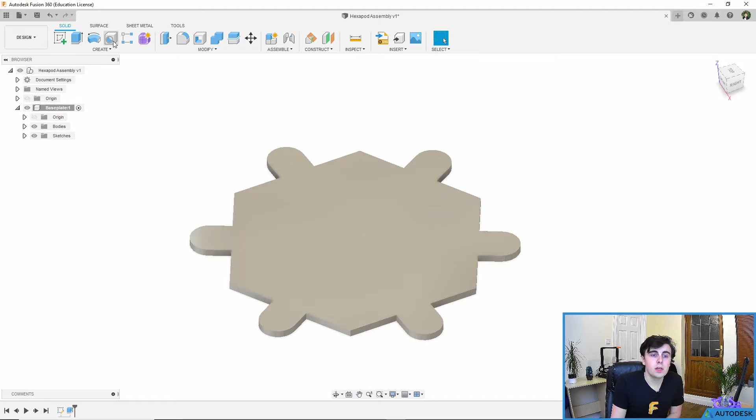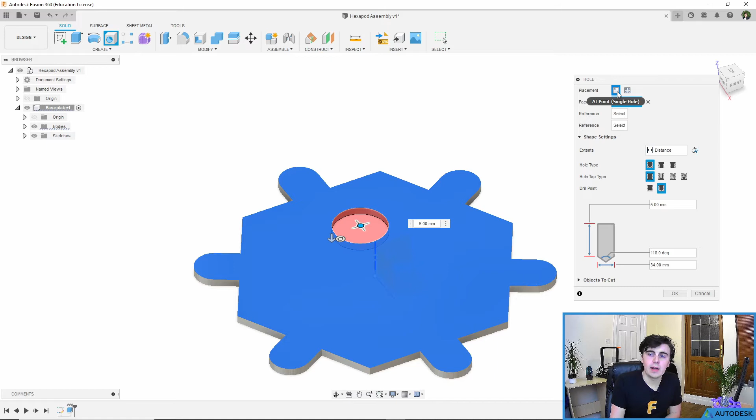What the hole tool does is it allows you to select a face and create a hole in that face of a certain size. There's a lot of different features you can use to create tapped holes, simple holes, or countersunk holes. In this case, we just want a simple one, and that's the default settings. But we want to make multiple, and with the normal at-point single hole placement, we can only create one.

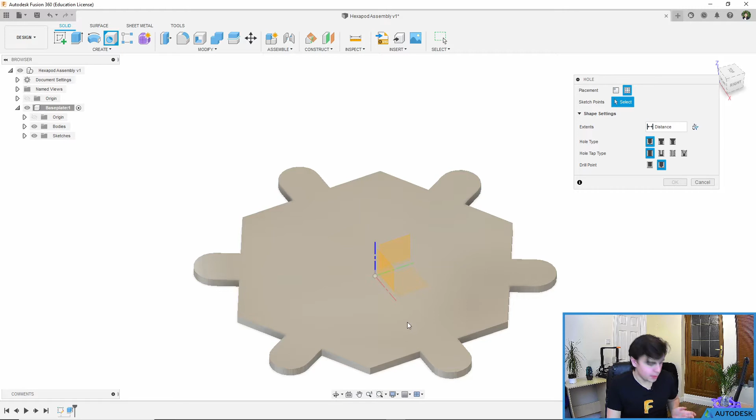So what we want to use is the from sketch multiple holes option. Now this allows you to use sketch points as references to create holes on. And if you remember, the sketch that we had those points referenced already from the semicircle. But you might notice that it's disappeared. Now the reason for that is that when you've extruded your sketch, Fusion automatically presumes that you've used your sketch and you no longer need it, so it's hidden.

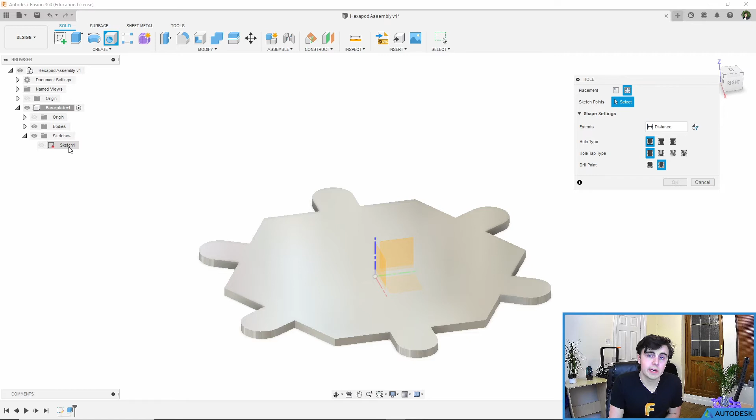If you remember, I talked about the little eye icon in the browser, and we can see within our base plate we have a sketches folder, and within that we have our original sketch that's hidden. If we click on the eye, you'll see it come back. It's just because Fusion thought we were done with it, but actually we want to use it again.

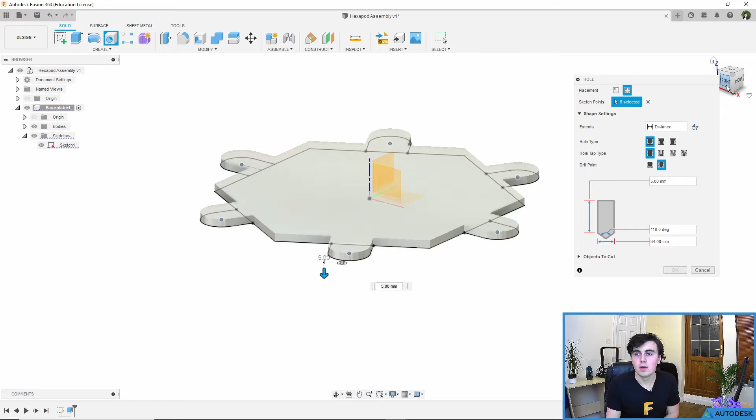And now what I can do is from multiple sketch points, I can select our 6 sketch points to put holes in. But again, you might notice nothing's happened, and the reason for that is that our arrow is facing down. Because we put our sketch on the bottom of our part, we actually want our hole to be upwards.

And so what you can do is, in the extents, after distance there's this little icon called flip direction. If I click that, you'll see that my direction has flipped, and it's started to cut some holes. In Fusion, when something's being cut away, it represents it with a transparent red area. Now currently, my holes are really big.

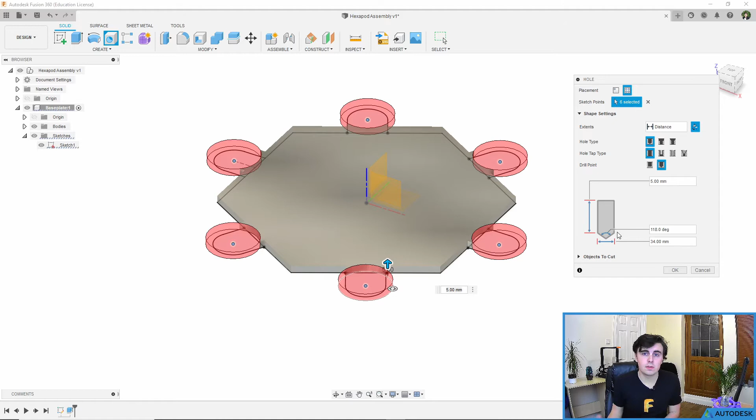If you look at the diagram on the hole tool, there's a little area at the bottom which defines the diameter, and it's currently 34 millimeters. Now this can be based off a preset, or off what you last typed in. Don't know why it's 34 for me, I don't know what it is for you. But you can change this to be 5 millimeters, which is how big we want each of our holes to be.

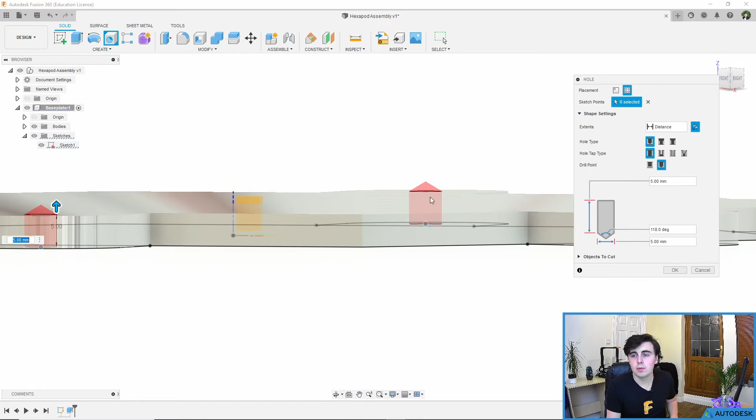You'll see now that these holes are cut out of our body, and they should cut all the way through. You'll also notice a cone on the top. That's a default setting, but you can change it here if you want, which is based on drill bits, so very useful. But it's 5 millimeters all the way through. Now it's automatically defaulted as 5 millimeters thick, but I'm just going to change this to show you another way you could do this.

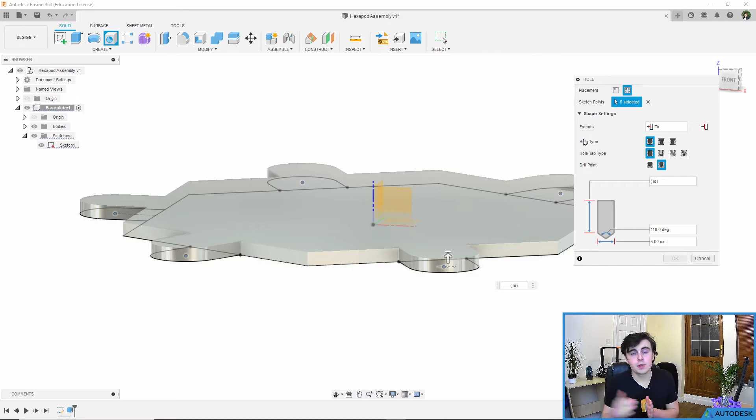In the extents box, you can change this to the To option. What the To option does is it allows you to cut or join or create something up to a surface. In this case, I've selected To, and now I'm selecting this top face, and you'll see that it automatically cuts our hole to that face, to that plane. It's changed it here to To, and it's just a selection. You could do it either way, but it's good to know both ways.

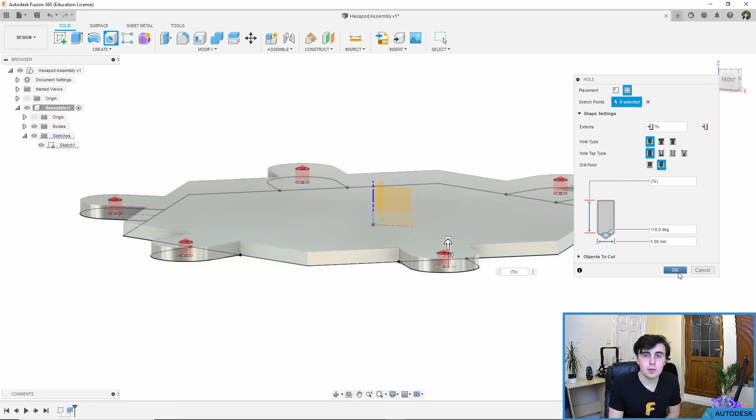Once you're done with your holes, click OK, and you'll see that your holes appear in each of your parts. You'll also notice that in our timeline we have our sketch, we have our extrusion, and we have our holes. And what that means is that by using the hole tool, we can go back and change our holes individually without having to go in and change our sketch, which makes it a really useful tool.

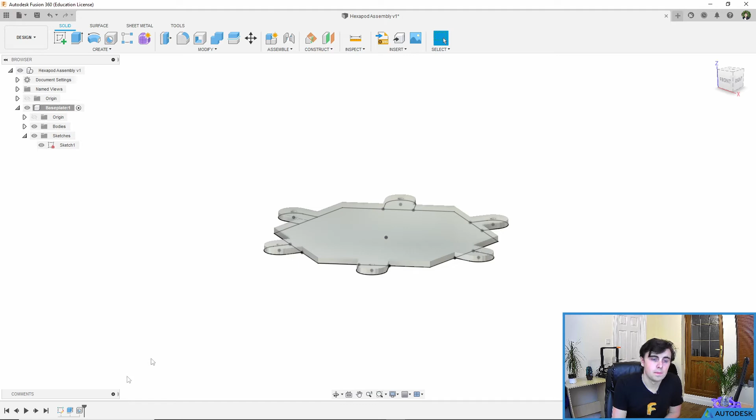I'm just going to hide our sketch again so that it's out of the way. Now that we've done this, we're going to make sure that we save. We're going to click save, and I'm going to say baseplate created. Click OK. You'll see a little tick appear at the top, hopefully.

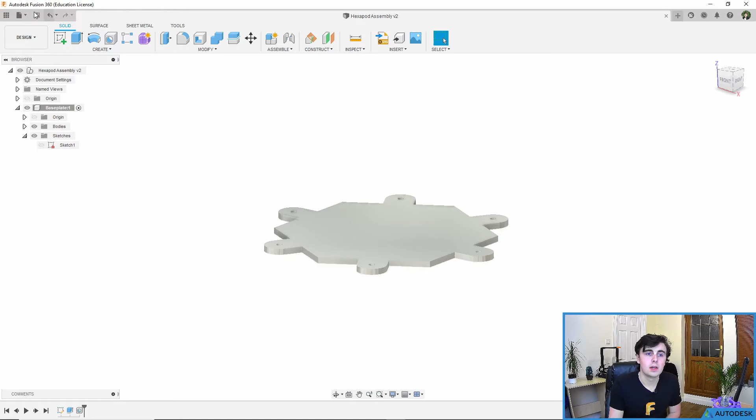It will change to be V2, which means that the Hexapod Assembly is the second version that we've saved. If you look in your data panel, you'll see that we're now on V2, and it shows I updated this 9 seconds ago. As you save, all your versions will continue.

Something you might notice is on the right hand side here, you have the options to open and promote. What these do is allow you to go back into your versions and take a look at what you did. In this case there's not much to see, but if I opened our created item, it would open that version at that time and we could look at it. It would be locked, we wouldn't be able to edit it, but we could look at it.

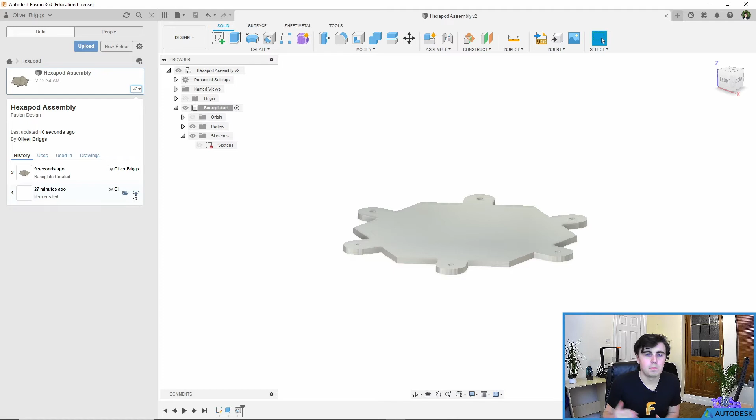Secondly, you can promote, and what this does is take that version and save it as the newest version. It won't delete all the versions you've done since, so if you do some work you don't like and want to revert back to an old version, it won't delete all the work you've done, so you can always revert to the revert, if that makes sense. You can promote any version up to be the new version. It's a really useful tool if you want to go back to a version you previously had. I just thought I'd show you that.

Now the way that we're going to do this is we're going to use the Modify menu, and we're going to add in some fillets, and then we're also going to go in and change the material. So first thing we're going to do is add in some fillets.

If we go into the Modify menu, you'll see second down is fillet. You can also press F on the keyboard, and this opens up this box. This will probably be the one it defaults to, and we want to select the type as a normal fillet to start with.

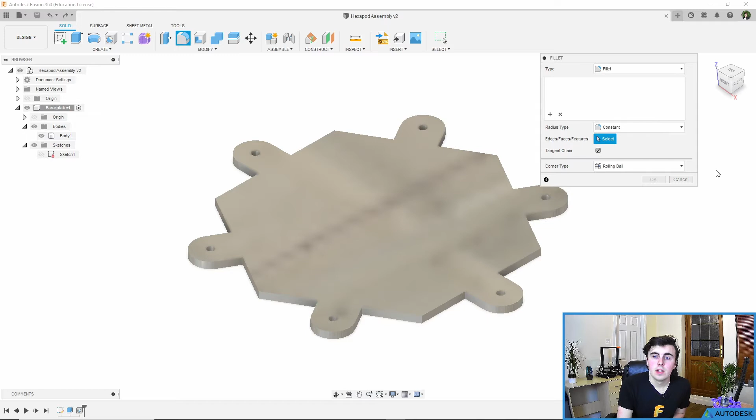You'll see we have this weird clear table box, but what we want to do is take away some of these sharp corners that we have on the outsides here and on the inside edges as well. So I'm going to start with these outside edges. I'm going to click on each one, and you'll notice that because we're using the fillet tool, Fusion recognizes that we're trying to select an edge.

You can still select a face, but we want to select these edges, so you can go through and select them. Normally you can't just hover over something and select an edge unless you change your preferences, but there is a way, and I'll show you that in a little bit.

We have our 6 edges selected for these outside corners. You can see it says 6 edges here, so that's right, and we can apply a fillet of, say, 5mm. I'd say that looks pretty good, but ultimately this is your design, so if you'd like to add a bigger fillet or a smaller fillet or not have a fillet at all, that's absolutely fine as long as you know how to use the tool.

You can also drag the arrow to make the shape whatever you want it to be. I'm going to leave mine at 5mm.

Now I also said we wanted to do these inside edges, and whilst I could continue to select it and add this up to 12, it would mean all our fillets would have to be the same size. Alternatively, I could theoretically add another fillet tool, press OK here and add another fillet tool. The problem is, as soon as you start doing that too much and add fillets with different sizes, you end up with a lot of different fillet tools in your timeline.

So a little tip you can use is this Add Selection Set button. What this does is add a second line in your table when you click on something, and it makes it a separate edge selection, so you can use different settings and different radius sizes for that. So I'm going to go through and select all of these inside edges here.

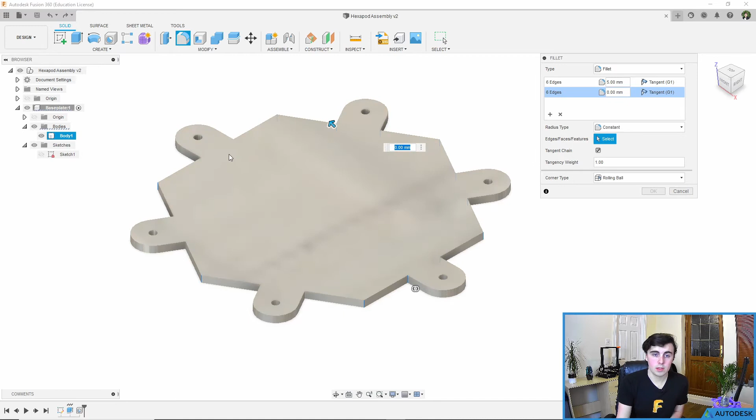I talked just a minute ago about another way you can select an edge. One really useful tool, we don't need it here necessarily, but if you're trying to select a body or something, you can hover over the area that you want to select. If your part is behind this body, hold the left mouse button, let go once this appears, and you'll see this dialog box appears with all the different options of what is there.

So we have 2 faces and an edge. This allows you to select multiple different parts that are hidden behind. It's a really useful tool if you're trying to get to something without having to hide all the bodies and re-bring them back. In this case, we don't really need to, we can just select them because we're in the fillet tool, but it's a useful tip to know about.

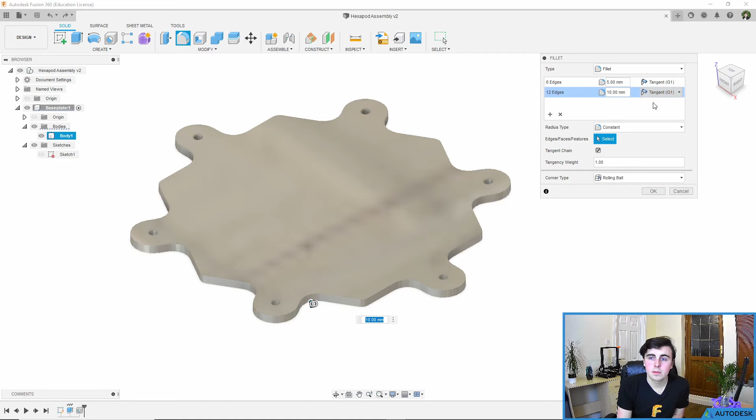We should have 12. Good. And again, we can just drag our arrow. Now I think that 5mm looks a little bit small for these, so I'm going to make mine slightly bigger, but again, you can do whatever you want, it's your design. So I'm going to make mine 10mm, I think it looks quite good. I'm going to leave all of our other settings, but you can change other things if you want to have a play around with them. Once you're done, you can press OK.

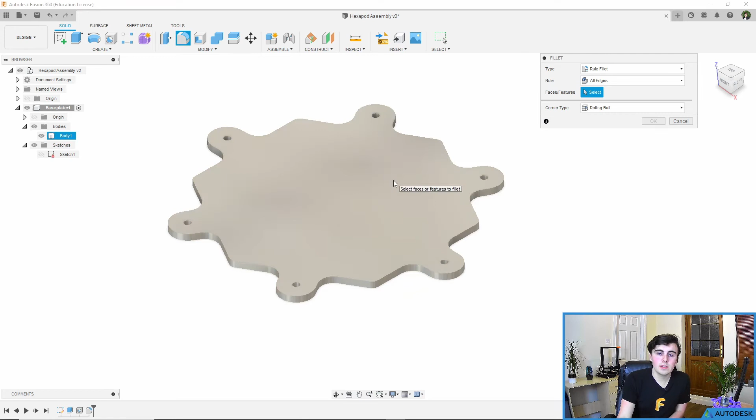Now we also want to add a fillet to these top edges, because these are a little bit sharp as well. So what we're going to do is create a new fillet tool, and change the type to make it a rule fillet. What a rule fillet does is it allows you to select a face, and all of the edges associated to that face will get the same fillet that you've assigned. So in this case, I'm going to select this top face, and it's automatically given us a 1mm fillet.

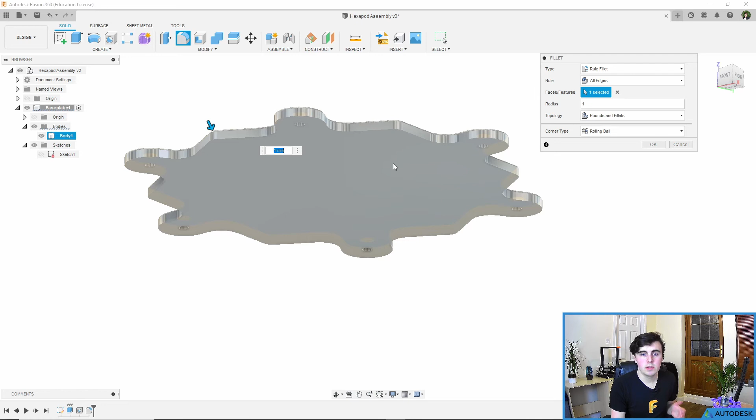I think that 1mm looks pretty good, but you can go in and change it if you'd like to, I'm going to stick to mine with 1mm. Now you also want to assign the same to the bottom face. You'll notice that it won't let you select a second face. The reason for this is that because a fillet has already been generated in your preview, it doesn't allow you to select another one.

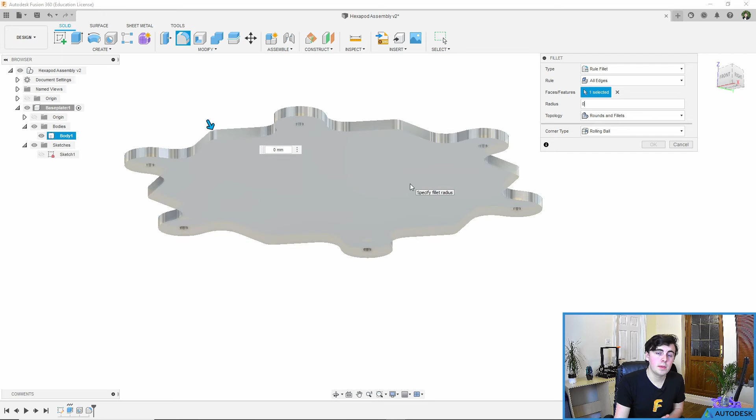It's a slightly weird part about Fusion, but it's something to be aware of, if you want to select something else, make this 0 so that nothing is being shown, nothing is being previewed, and you'll now be able to select your bottom face. Just be aware of that, it pops up in a couple of different tools. I'm not entirely sure why it happens, but it does, so just be aware of that.

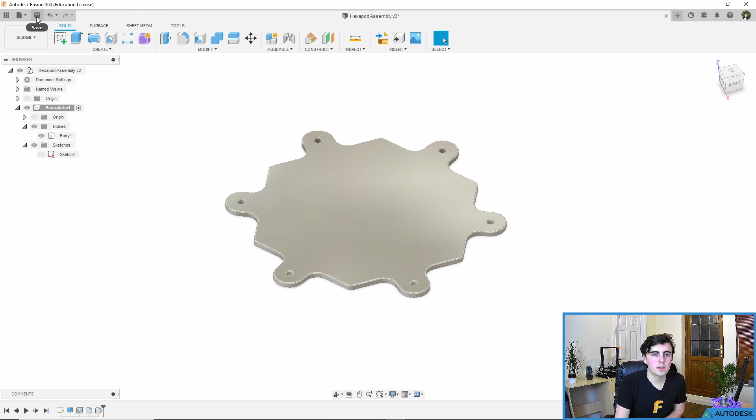We can now go in, change this back to 1, and you'll see that it's applied to both faces. We now have nice smooth parts, so I'm going to press OK, and it's all looking pretty good. At this point, I'm going to press Save, and say fillets added to base plate. Once it's saved, see it update to version 3.

Now the next part I want to go in is I want to modify our material. Something to be aware of, a really useful tool, is the Properties tool. You can find this in your browser by right-clicking on certain parts. If you right-click on a component, you have loads of different options, and you can select physical material. But first, I want to know what our current material is, and there's a Properties option that allows you to do this. Now it's not in a component, because the component isn't what has the material.

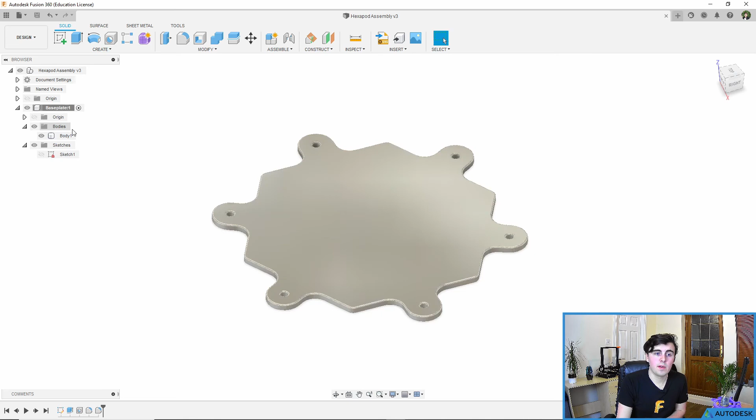What has the actual physical 3D material is the body itself. So within your component, you'll see you have bodies and sketches, and your body is the actual 3D part of that entire component. If we right click on body 1, you can see the Properties option.

We can see its area, its density, its mass, its volume as well, which can be really useful in certain situations, but also we have its physical material and its appearance.

Now in Fusion 360, the physical material and the appearance are both preset as steel. That's the standard default setting. You can change this in your preferences up at the top, but that is what will be default, so I suspect it's what you have as well.

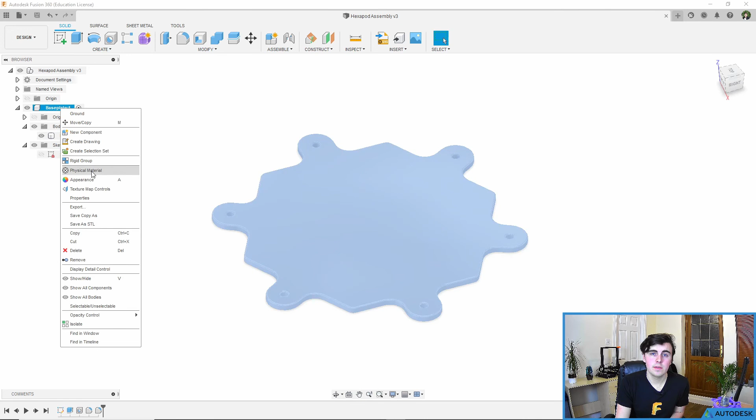We don't want our part to be steel. It's pretty heavy more than anything else and a little bit ugly, so I'm going to change this. As you saw, you could right click and select physical material. We could also go into the modify menu, down at the bottom, and select physical material. If you click on this, a pop-up menu will appear with a long list of materials.

Up at the top, you have what's currently in the design. So in this case, I could have seen that our part is steel, because this is the only part and steel is what's assigned. But if you have loads of components in a single file and you want to know what's going on, the properties menu can be really helpful.

You have a bunch of different libraries. You normally stick to the Fusion 360 material library, but you can add things in. We want to go in and select a certain material. I'm going to go into plastic, and select ABS plastic as my material. It's lightweight, it's easy to manufacture, and it's fairly readily available.

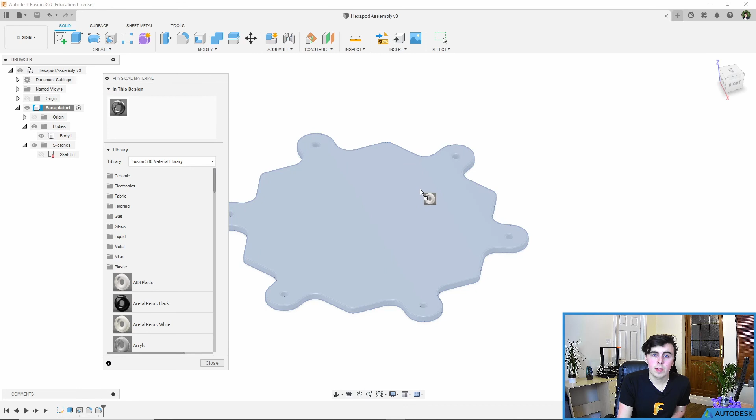So I'm going to click and drag it onto your part. You'll see that ABS appears in our top section, and it's now turned white to match the ABS we have. Once it's done, you can close this, and go back into your properties menu, and we can see that our mass is now way below what it was. Before it was about a kilogram, just over a kilogram, and now this is only 137 grams. So we've really saved some weight there.

You'll also notice that our material has changed to ABS plastic, and our appearance has also automatically changed. Now you can go in and alter appearances separate from their physical material, and we're going to go through this a little bit later when we go into rendering.

Just another point I want to bring up about the properties menu is that whilst it's a very useful tool for modeling, to be able to look at what's going on, and maybe if you're designing, to know the weight or the volume of something is very useful, it's also very important to know about if you're going to take an exam in Fusion 360, specifically the Autodesk Certified User Exam, which hopefully a lot of you will be working towards. It's a certification you can get from Autodesk, and it uses this box a lot, because as you're being tested, you go through and use the software, and it uses stuff like the mass to determine whether you've got a part correct.

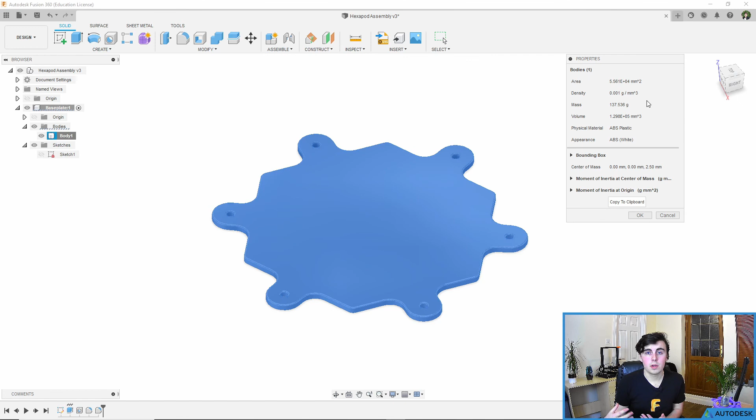For example, the question could say, add a 5mm fillet to these 6 edges, and it would give you the part, and then you change that, and then it would ask you for the mass having done that, because obviously adding the fillet adds a little bit of material, so to 3 decimal places, your grams are going to go up slightly, and then you put that mass in as the answer.

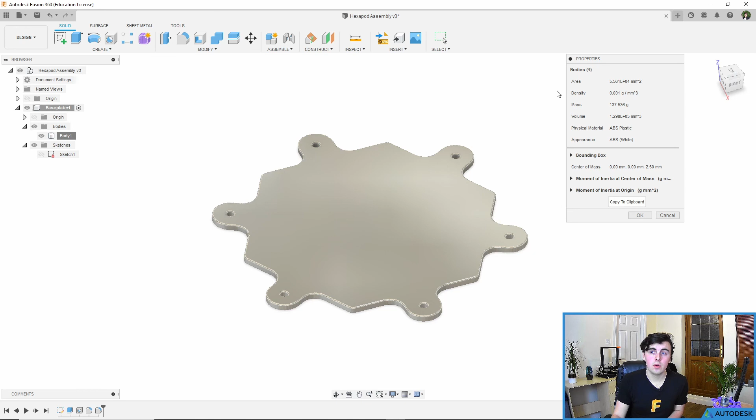So it's a really imperative piece of knowledge to know how to access the properties menu. Again, I'll just go through it again. Right click on the body. You'll see if you click on it normally, it'll highlight. And if you right click on it, you get properties. Really important to know the mass and the volume and how you can get them for those exams. Just a little tip.